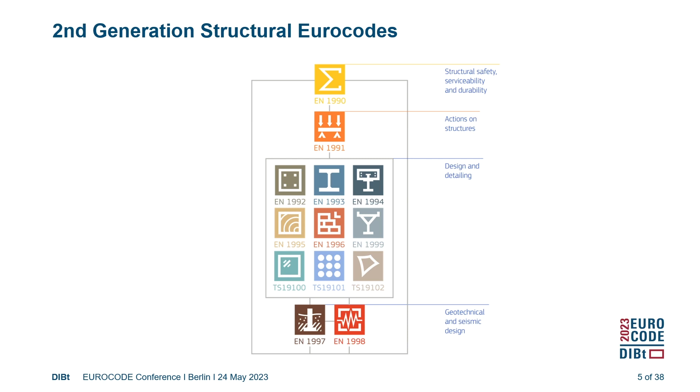So this is the structure of the second generation of the Eurocodes. The standards that many of you will be familiar with, running from EN 1990 through to EN 1999. The most observant within you will notice that we have 3 new additions in the second generation of the Eurocodes: TS 19100, 19101, and 19102, covering structural glass, fiber polymer composites, and tensioned membrane structures. And those are currently at TS standard level, but on a pathway to achieving EN status.

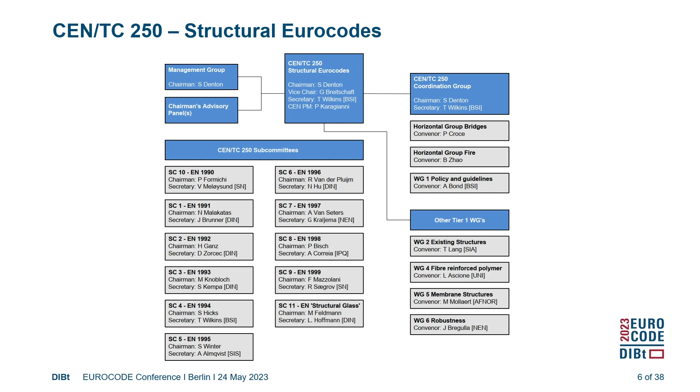And the way in which TC 250 organizes itself is that the responsibility for those standards rests principally with our subcommittees, and that's why it's such a pleasure that all of the subcommittee chairs are going to be speaking to you today and explaining to you what is happening specifically with each of those Eurocode parts.

So why do design standards matter? The speakers so far today have talked a little bit around the importance of standardization, but I wanted to share with you some of my perspectives on this.

The first point I want to make is impact. The Eurocodes are used by over 500,000 engineers across Europe and around the world. It's something that we talk about within TC 250 - that work we do, those decisions we take in those meeting rooms across Europe, it's easy to get focused around the kind of minutiae of what we're putting on each page and forget the impact of it. And it's so important that we always remember the impact of the decisions we take.

The second characteristic that makes design standards so important in the construction sector is that what we do is typically at a scale which means it's very difficult to test prototypes. In most branches of engineering, lessons are learned in labs and factories, but in construction, we tend to learn lessons on real live projects. And what's crucial is that before something is built, we need a means by which we can verify the adequacy of our design.

Design standards fulfill that role. They enable us to confirm that our designs will be safe, serviceable, durable, and robust before they are built. And that's a fundamental need within the construction sector, perhaps making standards more important in the construction sector than they are in probably any other branch of engineering.

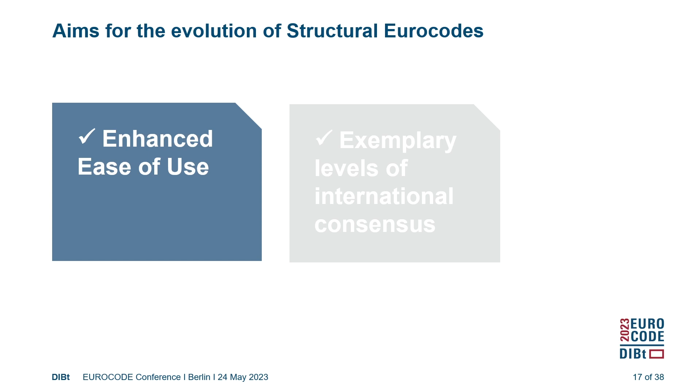What I want to do now is talk a little bit about the steps we've taken, the approaches we've taken, to try and fulfill these aims for the second generation of the Eurocodes. So firstly, in terms of enhancing ease of use, one of the first things that I did when I became chair of TC250 was I set up an international panel. It had 16 members, and that panel consulted widely across Europe to define what we meant by enhancing ease of use and to develop recommendations for how we should work to enhance ease of use with the second generation Eurocodes.

And to put that into practice, we established 5 pillars to support that: putting together statements of intent to meet users' needs, setting principles and priorities, providing examples for the thousands of people engaged in the Eurocode developments, looking at measures to try and understand how we were progressing, and then putting in place appropriate management, governance, and support.

So digging into these a little bit more deeply, in terms of those statements of intent, the users - one of the first things we did was to look at all of the different users of the Eurocodes to understand the diversity of users, but also to recognize, which I think is vital whenever you write any document, who is your primary audience.

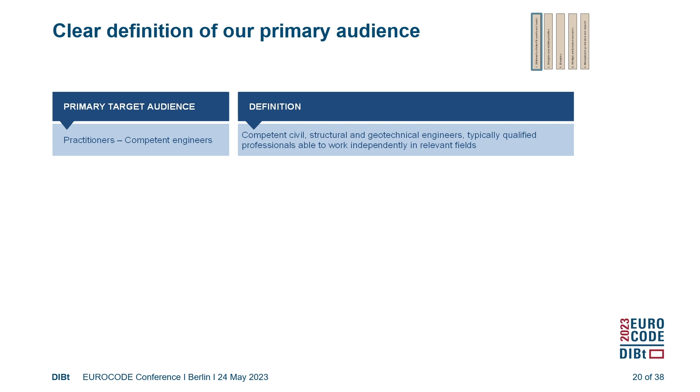So we defined our primary audience for the Eurocodes as practitioners and competent engineers - competent civil, structural, and geotechnical engineers, typically qualified professionals able to work independently in relevant fields. It took a little bit of time to arrive at that definition, but I think it served us very well, because there have been thousands of experts across Europe involved in the evolution of the Eurocodes.

And it's challenging to make sure that everyone works to a common baseline that understands those shared objectives. Having these kind of definitions means that whenever we're working on a document, we can think, well, does this fit for our primary audience? That's a really, really important thing for us to be able to do.

But we went further than that to recognize that we do have a lot of other users, and we mapped them out, and we prepared statements of intent for each of those groups of users.

So for our primary audience, we set ourselves that objective of saying we will aim to produce standards that are suitable and clear for all common design cases, but crucially without demanding disproportionate levels of effort to apply them. Or for expert specialists, aim not to restrict innovation by providing freedom to experts to apply their specialist knowledge and expertise. And there are, in developing standards, some very practical things that we can do to enable that.

For example, in the selection of the verb forms that we use: whether a clause is a requirement, a 'shall' clause, a recommendation, a 'should' clause, or a permission, a 'may' clause. But going further, for educators looking to have consistent underlying principles, or for regulators to produce standards that can be referenced or quoted in national regulations. So we set ourselves that set of statements of intent.

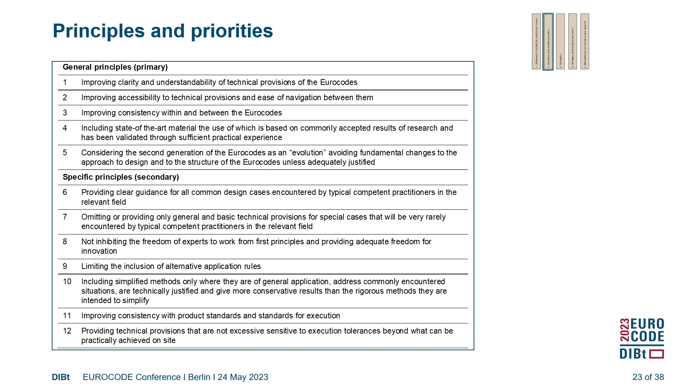And then what we've also put in place were those other 3 pillars around guidance and management, support and measurement. The appointment of our technical reviewer for the Eurocodes has been a really important step. So every single one of the drafts has been reviewed by Mary Pierangelino in her role as technical reviewer, or by Michael Fardis, my former vice chair. Everything has been scrutinized, not just within the experts in that field, but to look at the interdependence and across the whole suite to try and achieve consistency as well.

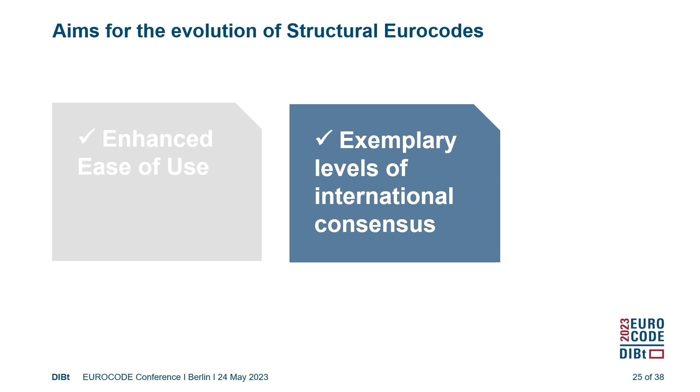So that detailed review of deliverables, guidance documents that we've put together, providing examples and advice and training for everyone that's been involved in the work - that's how we've looked to embrace that first aim, to enhance ease of use, and then the second, to achieve exemplary levels of international consensus.

My role as chair of TC250, one of them, is set out in the CEN internal regulations, and it says that my job is to do everything possible to obtain a unanimous decision, but if unanimity on a subject is not attainable, the chairman shall try to seek consensus rather than rely on a simple majority.

And I remember when I first read this in the CEN internal regulations, probably about 14 or 15 years ago, I'm not sure at the time I really understood what it meant, because if you've achieved consensus, have you not got unanimity?

But I've learned a lot over the last decade or so. And I think one of the key things I've learned is that consensus is not so much about the outcome, but about the journey you follow to get there. Consensus is not arriving at a destination which is every person's top preference. You can't always achieve that. People come into this work with different perspectives, different priorities, so we can't always achieve everyone's top preference. But what we need to do is try and arrive at an outcome that everyone can stand behind. That's what it means to build consensus, an outcome that everyone can support.

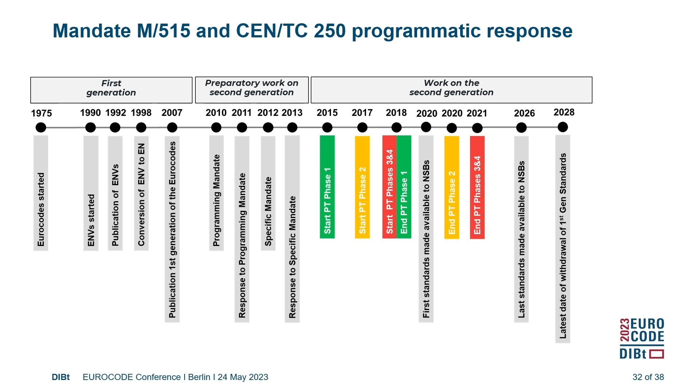In terms of the program, the timeline, this runs through a little bit of the history, going right back to the development of the first generation. As I mentioned, the work on the development of the second generation has been undertaken in four phases of project teamwork. All of that's now concluded. And now we're really at the business end of things, as Gerhard's already said, where we have the documents going through the processes of inquiry and formal vote.

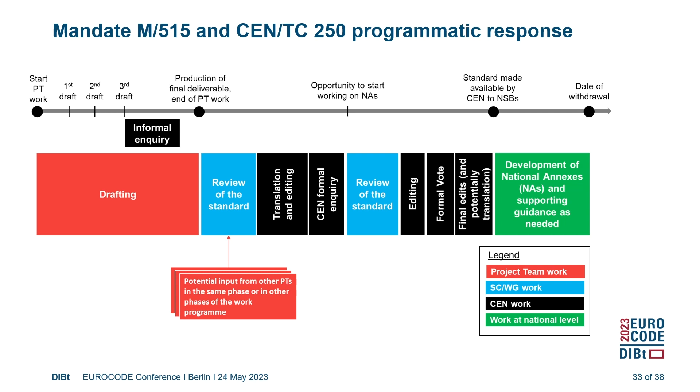There are defined steps that we take with this, and they're important. Each document, once it has reached a sufficient level of maturity, goes through a process of translation and editing and then a formal inquiry. That inquiry provides the opportunity for all of the CEN members to comment on a clause-by-clause basis on every one of the documents. Those reviews are received by the responsible subcommittee, and they're obliged to go through comment by comment and provide a response to every single comment we receive, sometimes thousands of comments, and then to produce the final version of the standard, which goes through the formal vote process I mentioned earlier.

And where we stand today is partway through this. We have some documents that have already gone all the way through to formal vote. We have others which are approaching inquiry.

It's useful perhaps for me to share briefly a couple of slightly technical terms because they may come up later today. One is what's called the date of availability of a standard, the date when CEN, the European standardization body, releases the documents to the national standardization bodies. And the date of withdrawal, which is the date by which conflicting national standards have to be withdrawn. In the Eurocode context, the conflicting national standards would be the first generation Eurocodes.

What we recognize, because the Eurocodes are an interdependent suite of standards, is that we can't treat these in isolation. You couldn't have different dates of withdrawal for different standards within the suite, as that could lead to quite a confused picture. So we have a common date of withdrawal that's been defined for all of the second generation Eurocodes.

The way this is going to work is that right now we have documents going through their inquiry and formal voting process. Some have already been made available to national standards bodies, meaning that at a national level, national annexes can start to be developed.

And just to finish, where we sit today - this is our program. People who've been working with TC250 will know this very well because we spend lots of time looking at this. We've been tracking this closely with all of the Eurocode parts, moving through all of the phases of preparation for inquiry and formal vote. You can see today we've had quite a number that have gone through formal vote, which is towards the end of the process. The inquiries, the yellow blocks, we're more than halfway through, and the final block of inquiries is going to happen for the second generation documents early next year.

So roughly, in terms of those inquiry and formal vote processes, we're probably past halfway. So we're a significant way down the track. We have a lot of very mature documents. We still have quite a lot of hard work ahead of us for the next couple of years.

And again, this is where we sit in terms of looking ahead to the inquiries and formal votes. As Gerhard rightly said, the timing of this conference, I think, is ideal. The documents are at a very mature state, but still going through those processes of inquiry and formal vote as we work to try and fulfill the aims we set ourselves for TC250 of enhanced ease of use and achieving exemplary levels of international consensus. And with that, let me wrap up now and hand over to the rest of the speakers. Thank you very much. Thanks.

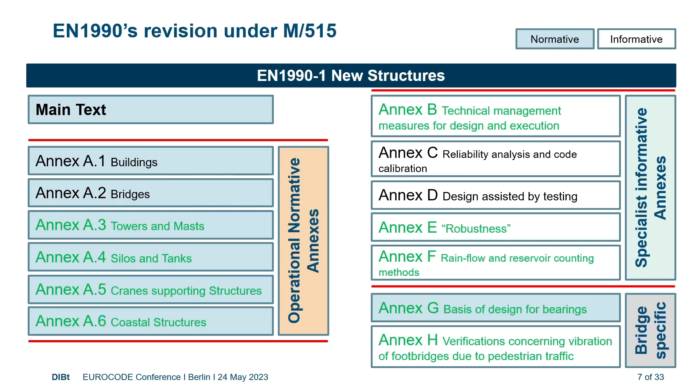So now let's start digging a little bit more deeply into the key revision aspects. I tried to put this together, but due to the time constraint, it's impossible to squeeze such a long work into a short presentation. I hope that this at least will raise your attention and curiosity to go and read.

But first of all, the very first innovation is in part 1, from the title. You will recognize that this is now 'Basis of structural and geotechnical design.' So what we have done is incorporate a number of overlapping issues that were in the first generation, taken from 1997, and we now have a full and comprehensive set of basis of design rules applicable to the design of geotechnical structures as well. To us this is a very important achievement in terms of enhancing ease of use, because basis of design is in basis of design.

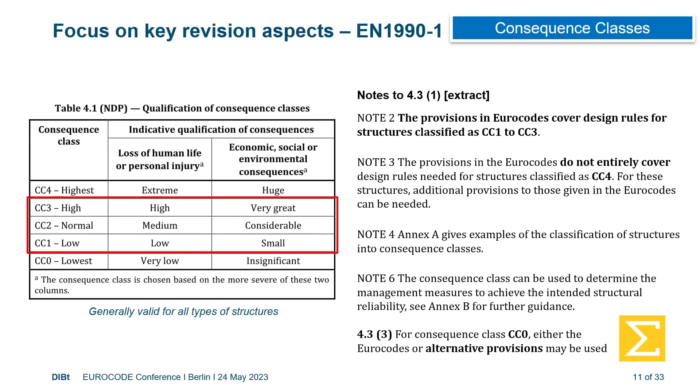Robustness is one of the requirements that we need to meet for the design of new structures, but we will see also for the assessment of existing structures as well. In general, for most structures, design in accordance with the Eurocodes is assumed to provide an adequate level of robustness.

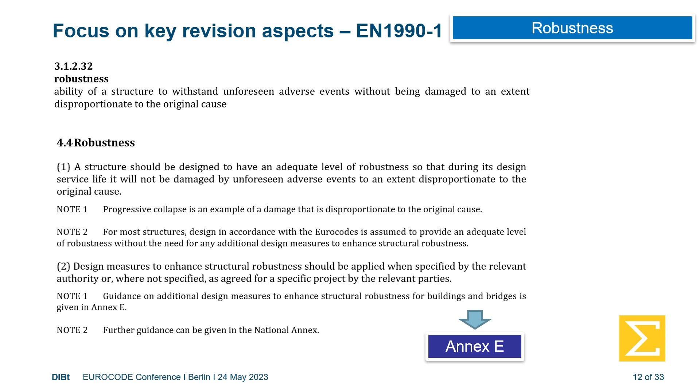So this is the very first important achievement of our discussion. If needed, and when this is needed is established by the national competent authority or by the client, or by needs related to the specific design, something more is to be done, according to measures to enhance structural robustness. These measures are outlined in one of the informative annexes, Annex E, a new one.

In the discussion we had, I will not go into the detail of Annex E, but just want to show you this table, because this is a result of a very long discussion, and to us is a very important point. We have clarified that robustness is normally the result of a set of activities.

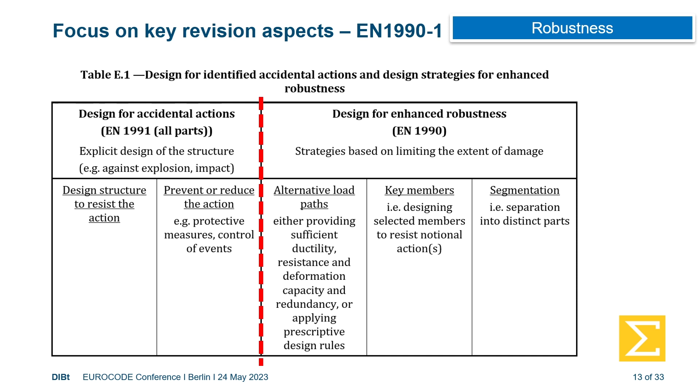It can be the result of designing for accidental actions, but this is our normal engineering verification. You have an action and you have a resistance and you compare. This is given by the left-hand side of the table. So you go in 1991, you take the accidental actions, and you do your verification. Nothing new. But this is providing robustness, not the enhancing robustness as intended in basis of design Annex E, which is the right-hand side of the table.

These are other strategies. You may provide alternative load paths. You may design key members to resist notional actions, or you may have segmentation of your structure in such a way that the collapse of one part does not affect the others. All these strategies are defined and specialized according to the different levels for the consequence class, and everything is written in this new Annex E.

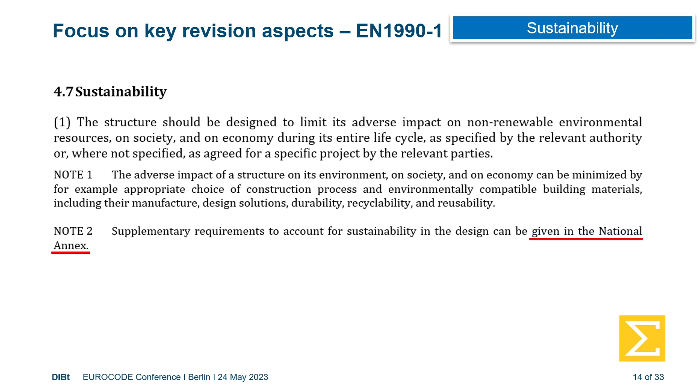Another important innovation is attention to sustainability. More and more this is relevant, as we have heard. We have this requirement to reduce the use of non-renewable environmental resources, which is extremely difficult to codify in a design standard. But what is important is that through this clause we have set a principle, a basic principle which can be achieved also by instructions given clearly in the national annex. You see in the note we're opening for further specifications to be given in the national annex on that.

Standards normally have a lot of performance requirements. We have reliability, durability, and so on, but it's on paper. We need to make sure that everything is transferred into the real world, into the building or into the bridge. How do we do that? Well, by implementing appropriate quality management measures, and this is codified in the main text.

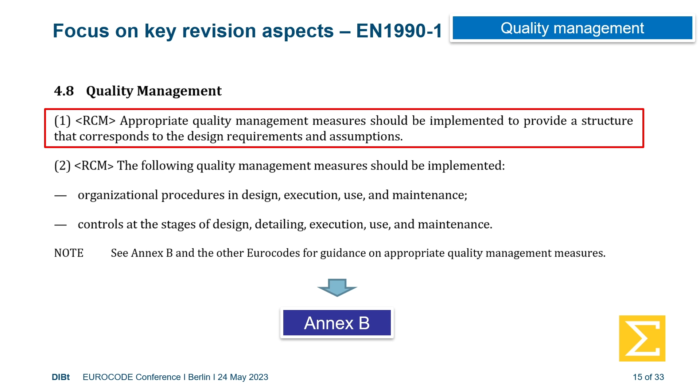This is clearly given here, that these measures should be implemented to provide a structure that corresponds to the design requirements and assumptions. This should deal with procedures in design, execution, use, maintenance, and so on. Again, how to achieve that is given in one of those informative annexes, in particular the new Annex B, which provides instructions on how to achieve these technical management measures for design and execution.

This defines four levels of activities, two of them dealing with the design stage: the qualification of the designer, first of all, and the checking of the design. The latter two deal with the execution phase, for execution quality, related to the execution standard, for example 1090 for steel structures, or inspection during execution, how to implement inspection procedures during execution.

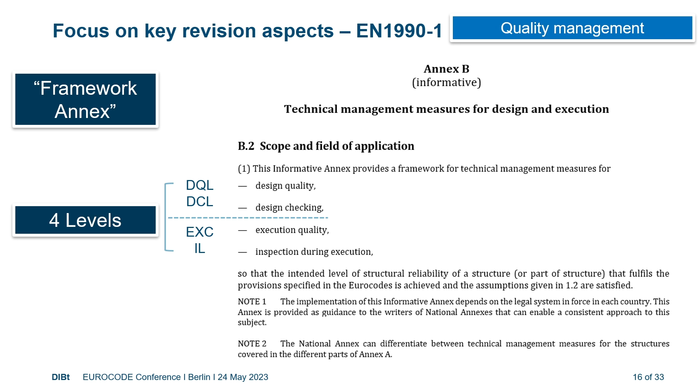This is a framework annex, because we're not giving the general rules for the qualification of designers. This is clearly something to do with national legislation. But in this framework annex, we set exactly a framework for how to use this information and how to implement this level of inspection and design qualification and so on.

In the end, everything is summarized by this table, which links the consequence class of your structure to the minimum level of qualification of designers, the checking level of the design, the execution, as we said, related to the execution standards, and the inspection level defined for the different classes.

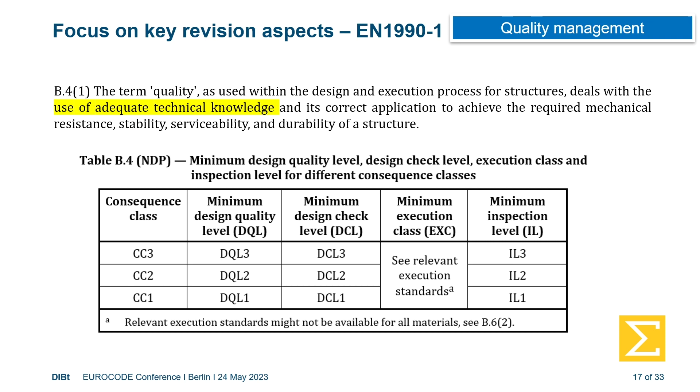Let's have a look at one example of the annex, the operational annex, for everyday use. This is Annex A1 for buildings, one big table with all partial factors. When I started my job as SC10 chairman, I got a comment that everything needed from us is combination rules and partial factors, which is maybe not really what is needed. But clearly this is one of the most relevant parts of the document, these partial factors that we use in combinations every day.

At first sight it looks complicated. I can promise you it takes 5 minutes to read it together with the notes, but everything you need is here. So for whichever combination you're dealing with, the partial factors are all given here. Notice we no longer have STR, GEO, and so on, but it's made clear by means of the notes and the text before the table. You just pick up your partial factor from this table whether it's a structural resistance verification or a geotechnical verification. Again, 5 minutes to read it the first time, and we hope much easier to use in future. This substitutes the 3 tables we had in the annexes in the first generation.

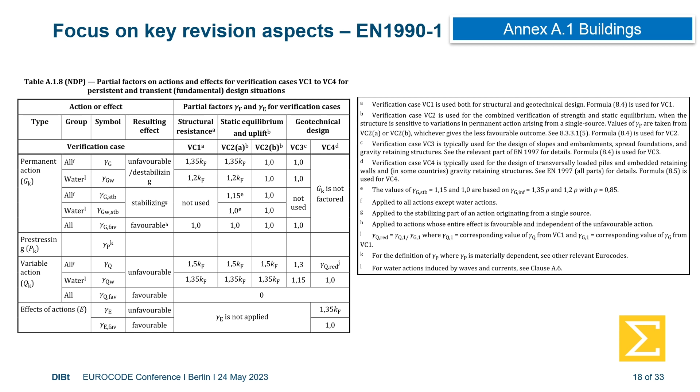Another important innovation is about serviceability criteria. In the first generation of 1990, there were only recommendations to meet serviceability criteria for buildings and bridges, but there were no suggestions or recommendations for limiting, for example, vertical and horizontal deformations and so on.

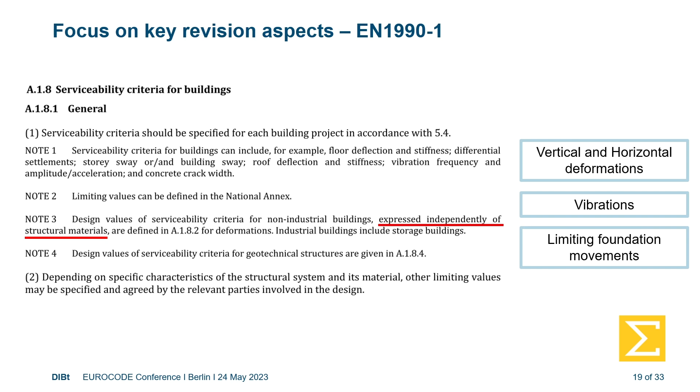What we have done is collect all the values and limitations in use in different countries. There was another group active on this in SC10 for this specific purpose. We put together the best practice collected in different countries for three areas: vertical and horizontal deformations, vibrations, and limiting foundation movements. We ended up with a set of recommendations independent of the material, as the basis of design is material independent. So what you'll find is an example for vertical deflection.

You're familiar with the figure, taken from the existing standard, showing the different components of deflection of the horizontal member. But you'll find a table, which is an NDP, providing you, depending on the nature of the limit state you're checking—whether governed by the characteristic, frequent, or quasi-permanent combination, and depending on the reversible or irreversible nature—the limitations suggested in this table.

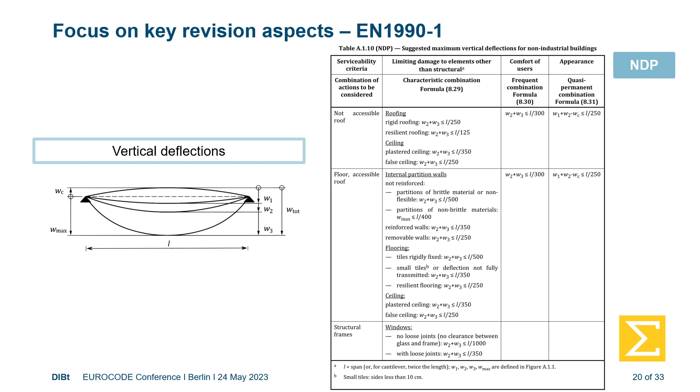The hope is that we can use this table to harmonize the limitations in the future across different member states. For example, if you're designing a beam in a floor and your internal partition walls are not reinforced and are fragile, you'll find the limitation is L over 500, for example. This is a recommendation to be confirmed as an NDP. Something similar is given for horizontal deflection, and an approach for vibration as well.

But another innovation is on limiting foundation movements. This is again completely new in the standard. We have focused attention on three important foundation movements which can lead to ultimate limit state or severe serviceability limit states, out of the number of foundation movements first described by Burland and Wroth in 1975. We focused attention on differential settlements (delta S), tilt (omega), and relative rotation, the angular distortion (beta), and how it is managed.

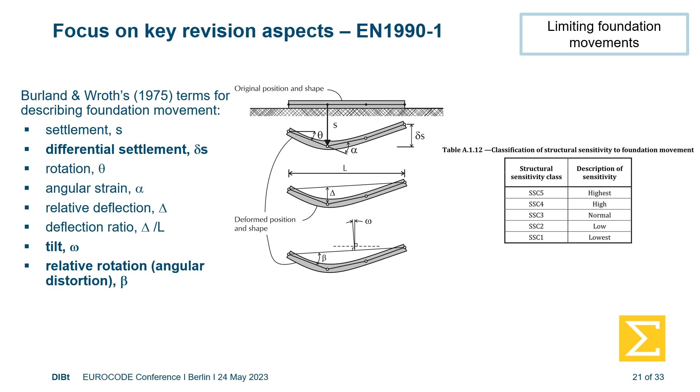Buildings are classified into different structural sensitivity classes, from 1 to 5, from the lowest to the highest sensitivity, and according to the classification in the sensitivity class, you will find, again as an NDP, recommended values of limitations for all these different foundation movement limits.

This is something more specialist, Annex C. It has always been for specialist users—reliability analysis and code calibration. What we had as feedback from the first generation was that this annex was considered a bit more theoretical. But this annex is a core part of the standard because it provides the values of the beta targets.

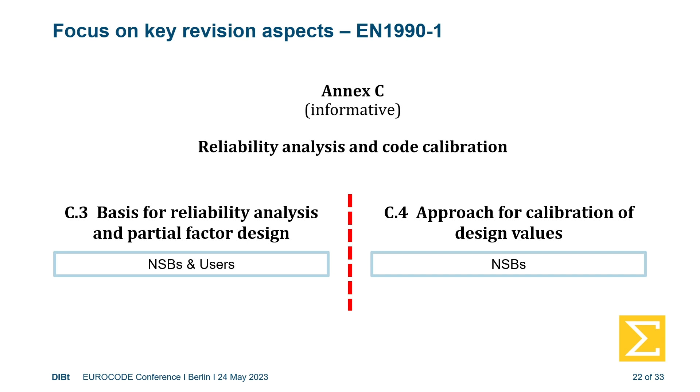These are the reliability targets that we want to meet by means of partial factors or other methods of calculation of our structures. So we tried to make it more readable for users, and in particular we made a clear distinction between two parts of this annex: the basis for reliability analysis, and partial factor design, which is for users intending to apply reliability-based methods. So here you will find instructions and the agreed methods to be used.

And the other one is for national standard bodies because it provides guidance on the calibration of partial factors, which is something which is not for users, of course, but we need to provide a common guidance for that as well.

You see here, this is the table with the beta targets, which are the recommended values, no change with respect to the previous edition. They're given in terms of 1 year or 50-year reference. Importantly, we have related also in the 50-year column the corresponding approximate value of the probability of failure in 50 years, so you see the idea is to have one order of magnitude difference in different consequence classes.

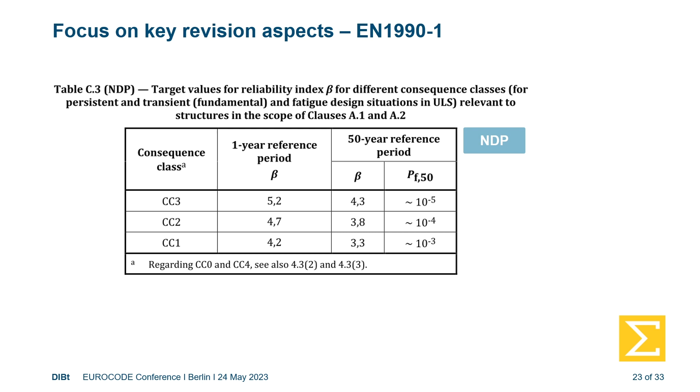Another important work that we have done in SC10 is to provide a JRC technical report. We have worked a lot on this, and there was a team of members, experts coming from all subcommittees. This will be made available, we hope, in the second half of this year. It includes the background, the history, what is behind the semi-probabilistic verification method, and also the guidelines for the implementation of the probabilistic and risk-based methods, and importantly, the annexes, in particular Annex A, with all the stochastic models for the variables that we use in the calibration of partial factors.

Very few words, I hope I'm in time, on Part 2. Part 2 is for assessment, as we said. It's completely new. It has been a very long discussion. We inherited the work of WG2 with Thomas Lang sitting here, and we had to transfer this into the framework of basis of design. This was a very long discussion. We ended up in April, so I would say yesterday, and the decision was taken to have this Part 2, covering the assessment of existing structures.

It is not really a self-standing document. It has to be used together with Part 1, because many parts of Part 1 are still applicable to existing structures, such as combination or the use of the partial factors and so on. This is again covering geotechnical structures, so the assessment of existing geotechnical structures as well. This is not covering seismic verifications, this will be covered by Part 3 of Eurocode 8, as historically has been covered.

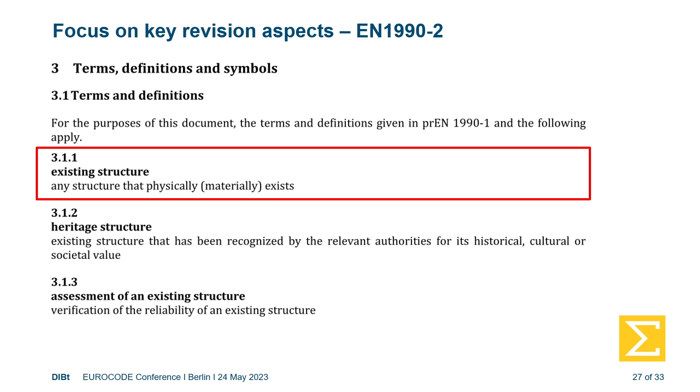I really, it's impossible to summarize a very long discussion we had like this, but it's just to draw your attention on some spots. The first one is existing structure. The definition of an existing structure is a very simple question with an extremely complicated answer. We could not find a satisfactory definition valid for all the member states, because you understand that there are a number of legal implications on what is an existing structure.

It has to be in use, it has to be transferred to the owner, who's the owner, by which act. So the definition is quite simple: any structure that physically, materially exists. But what is given is the possibility in the clauses in the main text of this document to add something in your national annex and to specify more details on what you think and what you define as an existing structure, and this is given here, you see, in the first red box.

We have in these assessment methods both quantitative assessment methods, which is the main way to perform the assessment according to the normal engineering practice that we use for new structures, but we also have some qualitative assessment methods which can be used in place of quantitative. This again depends on the national annex, on the experience that you gain at national level for certain types of structures, for example, and can be used to assist the definition of the scope of the quantitative assessment method. So it's a set of methods which are offered as possibilities to the assessors.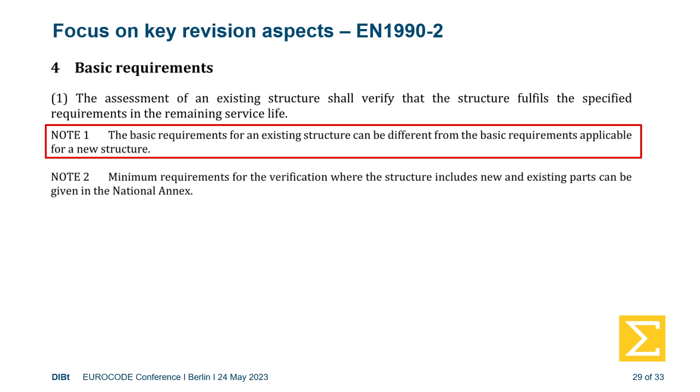Important part: clearly the basic requirements for existing structures are not the same as for the new ones, and in particular they can be changed, the reliability targets. Typically, for existing structures, we can accept a lower level of reliability because the structure is existing, so it's already survived a number of events. But this is, again, clearly stated and clarified in the text.

How to do that? The assessment needs to be done according to the partial factor method, so it's completely consistent with the experience that we have gained in the new structures. But there is also an opening not to prevent innovation, not to prevent deepening of the analysis, to the reliability-based method and to the risk-informed method. Clearly, there will be a restriction possibly in the national annex for that.

Want to finish with showing you this flowchart.

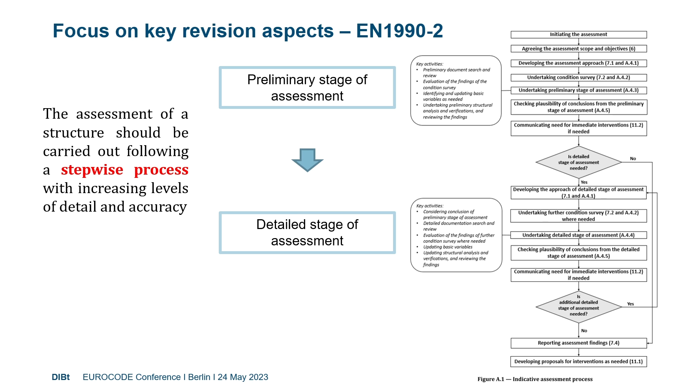We won't go into detail, but you'll recognize that the approach for the assessment of existing structures is clearly a stepwise process. We start from some preliminary activity, then go deeper and deeper if needed, and we can exit the process if we think the preliminary stages are satisfactory. Finally, if the outcome is negative, if the structure is not fulfilling the performance requirements, then what to do?

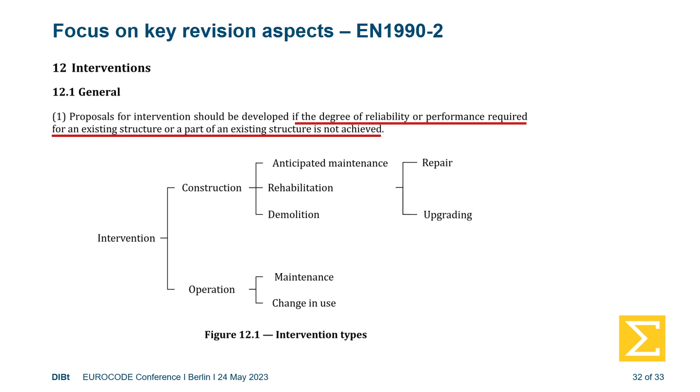Well, we have some general principles on interventions, which can be constructional or operational in nature, and this is current practice. Constructional intervention can include maintenance, if anticipated in the design, or rehabilitation, which is repair or upgrading of the structure, or even the worst case, demolition. For operational cases, you can have maintenance again, or a change in use to reduce the loads, for example, to make this acceptable.

Thank you. Thank you very much for your attention.

I think the thanks goes to you. This was really a very informative talk, and just on time. Thank you for this. We will now have a look at actions on structures with Nick Malakatas. Thank you, the stage is yours.

Thank you, everybody. Let me also express my pleasure for being here and contributing in this workshop. Thanks to DIBt and Gerhard.

Ladies and gentlemen, and dear colleagues here in this room, and so many of you connected online, I'll try to make a rather ambitious task, and you'll see what I mean, to present you the key changes and updates of Eurocode 1, which is a quite voluminous standard with a dozen parts, as you see, and mainly focused on actions and loads for buildings, bridges, and other civil engineering structures.

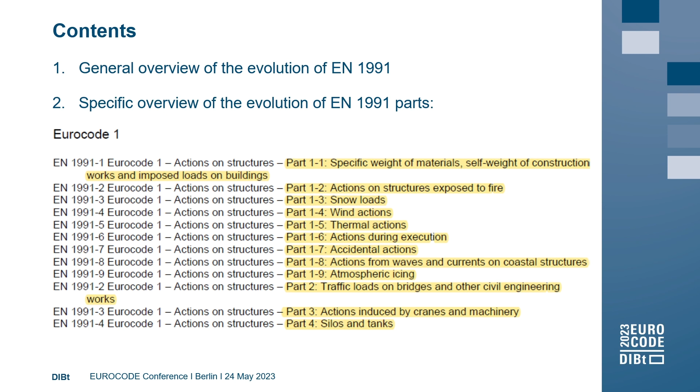You recognize imposed loads, self-weight, fire, snow, wind, thermal actions, execution, accidental actions, and the new parts: actions from waves and currents on coastal structures and atmospheric icing, and also traffic loads on bridges, crane supporting structures, and silos and tanks.

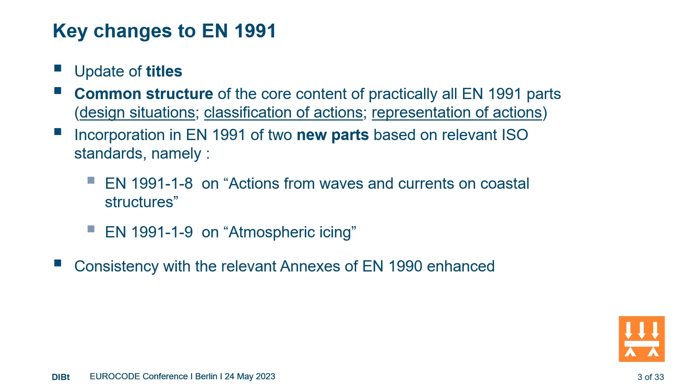So basically, except for some update of the titles, we have achieved to create a practical, common structure for all Eurocode 1 parts concerning the core content, mainly the design situation, the representation of actions, and the classification of actions. As I just said, we have two new parts that have been based on the relevant existing ISO standards. Finally, we have improved the consistency with EN 1990, which you just saw presented by Paolo Formichi.

So I'm afraid there will not be so many figures, but I will try to give you the most relevant information. For example, we have introduced and clarified some notions like the tributary area, the area which is loaded and should be considered in the design.

We have now a single table with all categories and subcategories of use for buildings, and similarly for the horizontal loads on partition walls and parapets.

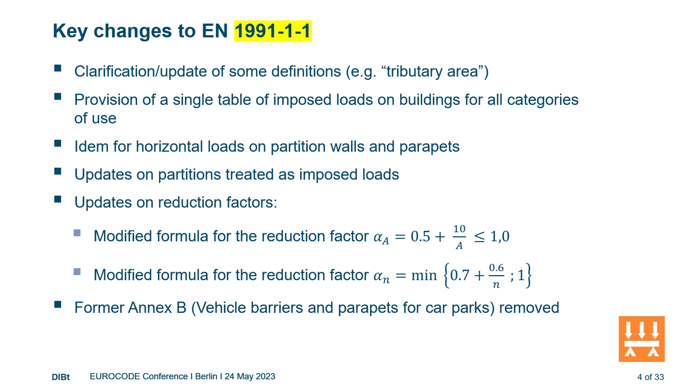We have some updates on the treatment of partitions, like imposed loads, as it was already in the document, but we have made some changes. We have also modified the two well-known formulas of the reduction factors: alpha A, to reflect the influence of the loaded surface and area, and alpha n, to reflect the number of stories. And the former Annex B has been removed.

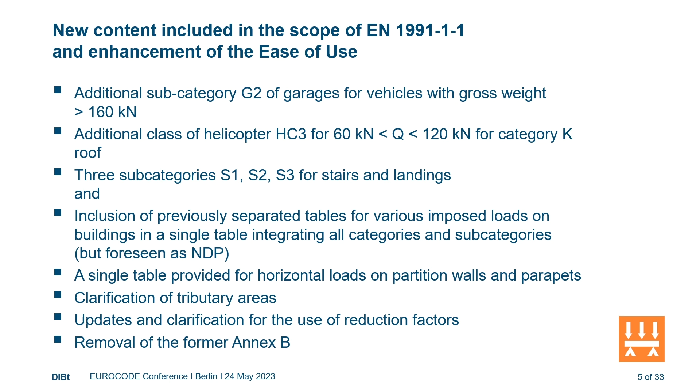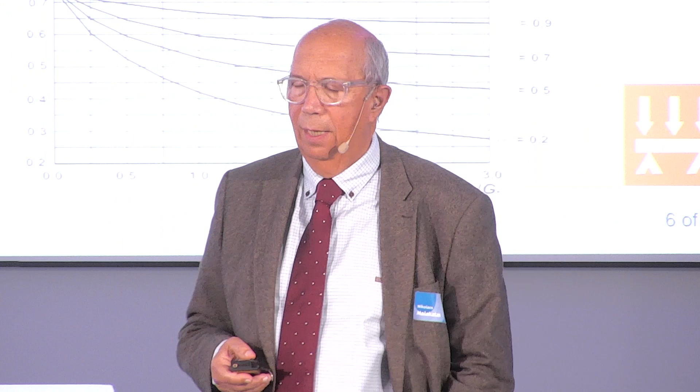We have also added, for example, an additional subcategory for garages and parkings, an additional category for roofs designed for helicopters, and subcategories for stairs and landings. All the rest has already been said, it's just a list of the parts that have an improved enhancement of ease of use.

Now, coming to actions due to fire, we have clarified the scope, especially as far as non-coverage is concerned. There are three items: first of all, we don't deal with sprinklers and active measures, nor with conditions of occupancy of buildings and fire compartments. And we don't deal with insulation materials, coating materials, and so on - those are matters for product standards.

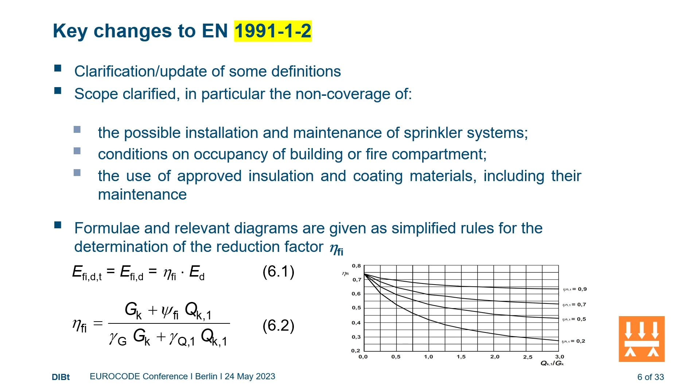We have some new formulas and figures, as you can see, to allow for a simplified calculation of the design fire.

Now, in the already existing Annex E, which is the annex on fire load densities, fire growth rates, and rate of heat release, we have the delta factors, which describe and reflect the different active firefighting measures. For example, sprinkler detection, smoke detection, automatic alarm transmission, the intervention of the fire brigade, and so on, has been revisited.

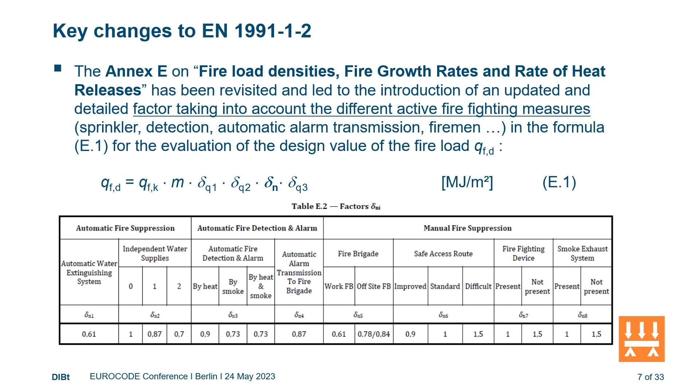And when you find the time to look in detail, you will find a very comprehensive presentation.

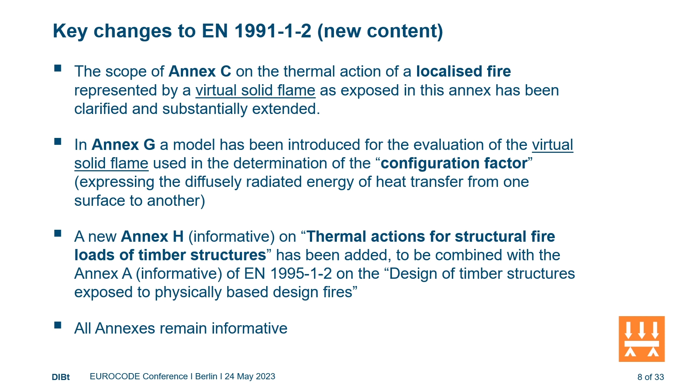In the former Annex C, which dealt with local fires, we have extended this annex and added design models, virtual solid flame as a geometrical design model. And equally on Annex G, which describes the so-called configuration factor expressing radiation of energy and heat transfer, we have made some improvements. The most important addition is the new Annex H, an informative annex concerning thermal actions for structural fires for timber structures.

Then I come to snow, and with this opportunity I have to say it was Paolo Formichi himself who was the convener of the relevant project team and group. There are quite a number of additions and renewals in this part. Just as a reminder, the snow part of the existing Eurocode has been based on a European research project in 1996, so almost 30 years ago, and some European countries at that time were not part of the project. So there was a need for changes, basically the development of new models closer to physics and based on experimental data from European climates.

Additional types of roof, additional cases, and specific models for snow local effects. We are now using the terms balanced and unbalanced for snow, not drifted and undrifted as in the ISO and the American snow standard. The Ce exposure coefficient has been updated to take into account the snow load for locally sheltered areas.

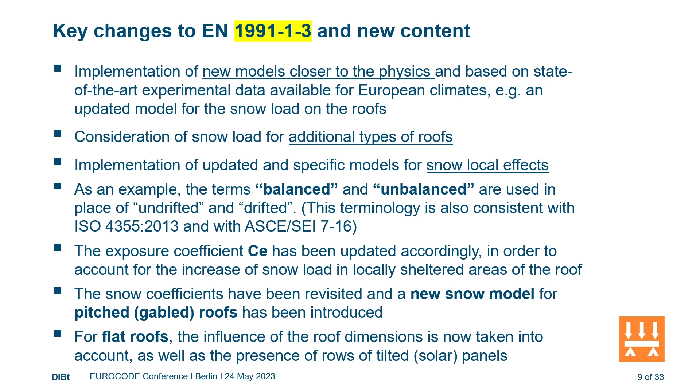We have some updates for cylindrical roofs and for domes, with a model which is closer to reality but more simple than the ISO model. And for multi-span roofs we have now made some corrections so that in the so-called valley between the roofs, the snow does not exceed the ridge of the roof. And finally, we have introduced two more models concerning drifting at obstructions, and also the intersection of roofs.

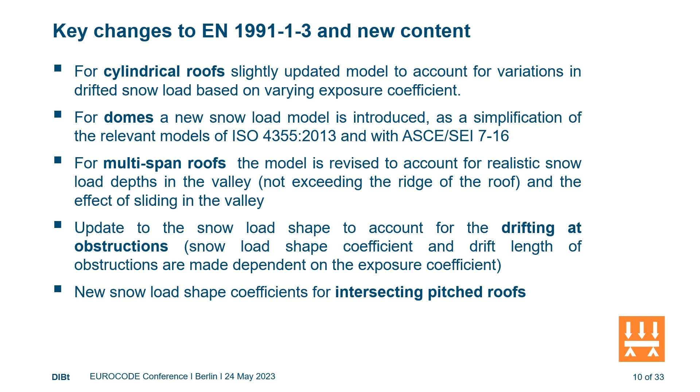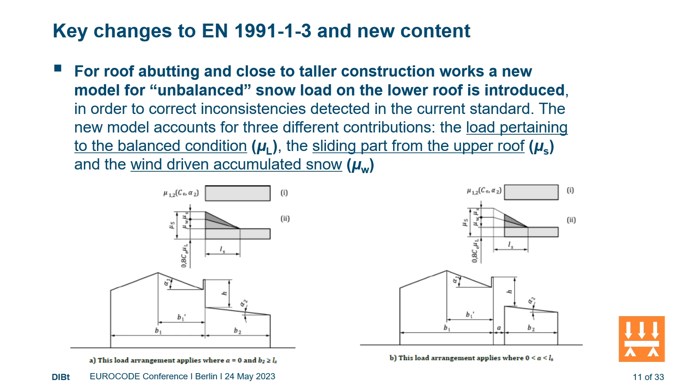And just another issue concerning buildings with different heights, one close to the other. We now have a model much closer to reality, with three components: one part for the load pertaining to balanced conditions, a second part to represent the sliding from the taller roof to the lower roof, and finally the wind-driven accumulated snow part.

So this is about snow. Concerning wind, we have made progress in the sense that we have extended the scope, the coverage for buildings up to 300 meters instead of 200 until now. We have a new formulation for determining the velocity, mean velocity and turbulence up to 300 meters. As you probably remember, we used to have two methods for the so-called structural factor, CsCd. Now we have a single method.

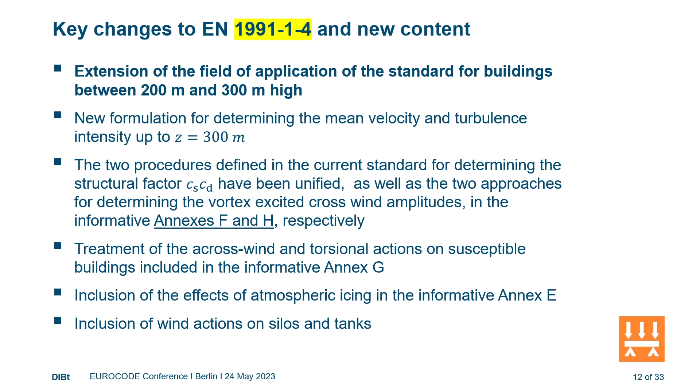We have merged the two methods in Annex F, while in Annex H we address the vortex-excited crosswind amplitudes, and also in Annex G, devoted to crosswind and torsional actions on buildings susceptible to torsional effects. We have also addressed the effects of atmospheric icing on wind, and we have added some clauses for silos and tanks.

The most important thing is that the aerodynamic coefficients, the pressure coefficients, which used to be in the main text, are now transferred as normative annexes, C, D, and E, concerning pressures on surfaces, pressures across walls, and forces on structures. We have added a number of additional cases, so we have a more extended annex. We have also transferred from the actual Part 3.1 of Eurocode 3 the part of wind concerning lattice towers and guyed masts.

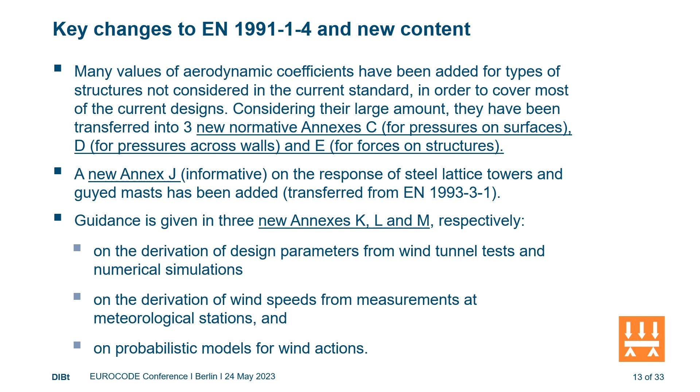And we have three more annexes: Annex K, for the derivation of design parameters from wind tunnel tests and CFD methods, numerical simulations; Annex L, for the derivation of wind speeds based on meteorological measurements; and a short Annex M on probabilistic models. As far as thermal actions are concerned, there are not so many things that have been changed, only some updates, merging of tables, and redrawing of figures.

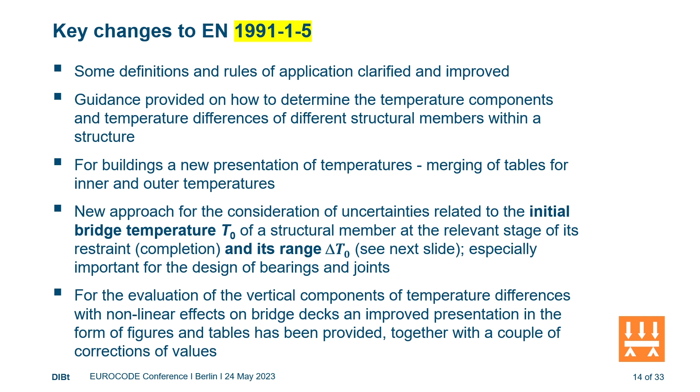An interesting new approach that has been added concerns the uncertainties related to the initial bridge temperature and to the range of this for structural members at the stage of completion of the restraint. So if we look at the next slide, you can see here it should be T0, and then delta T0, which express the uncertainties.

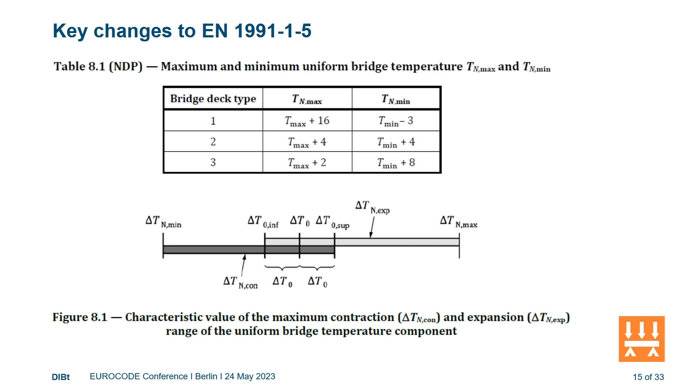Now, concerning the part devoted to actions during execution, we have made some progress concerning the delimitation of the scope of the field of application of the document as compared to relevant existing standards, for example product standards for formwork, scaffolding equipment drafted by Technical Committee 53, and for auxiliary structures.

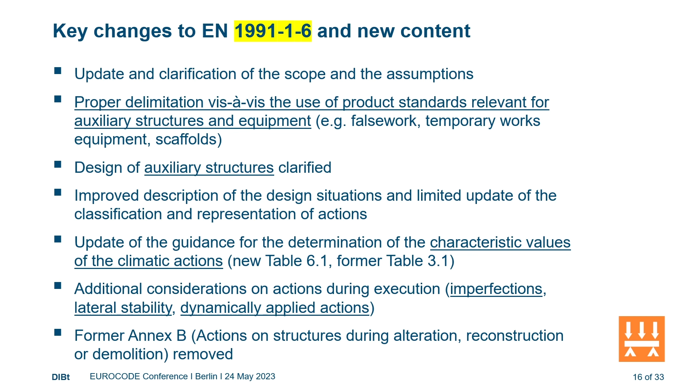We have improved the design cases to be taken into account, and we have added some aspects concerning imperfection, lateral stability, and dynamically applied actions. The former Annex B has been removed.

Last but not least, the former table 3.1, which is now table 6.1, gives guidance for the determination of the characteristic values of climatic actions during execution. You will recognize the table.

This is the typical case where you have a duration of more than 1 year, so you have the 2%, 1 in every 50 years annual probability of exceedance. In case you have a shorter duration, but more than 3 days, it's a similar procedure, but you have to take into account seasonal variations, while for very short periods, you have to rely on reliable meteorological data.

We have also offered, in a way, the possibility for the relevant authority to specify a threshold value or a range of values. This has some practical importance in some cases, when the use of this threshold value has an impact on deciding whether to go on with the execution or not.

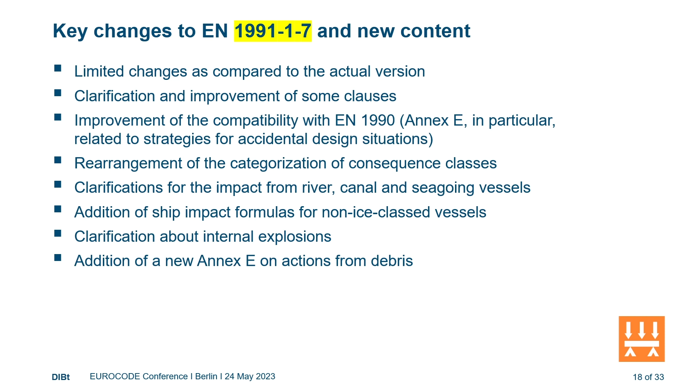And there is an addition of a new Annex E, which I would say is inspired by the existing German national annex, and refers to debris.

We have two new Eurocodes. The first one concerning waves and currents. It doesn't make sense to compare, except with the ISO standard. The main difference is that our part focuses only on actions, whereas the ISO standard was also a design standard.

The ISO standard did not follow the full reliability framework and partial factor method as in the Eurocodes. We have to frankly admit that it is not so obvious to comply 100% with the reliability framework of Eurocodes for all types of coastal structures, especially for breakwaters.

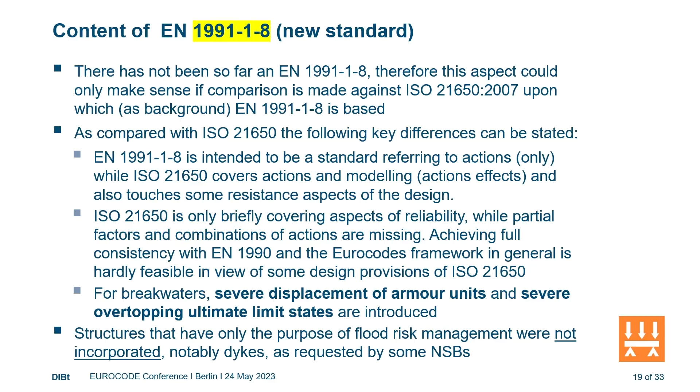That is why we have introduced two more ultimate limit states, the so-called severe displacement of armour units and severe overtopping. This is specifically for breakwaters, while as far as flood risk management is concerned, we have practically excluded this topic from the field of application, from the scope of the standard.

We have two important parts, one concerning the use of physical modeling in laboratory tests, scale tests, and the other one, some additional specifications for reliability.

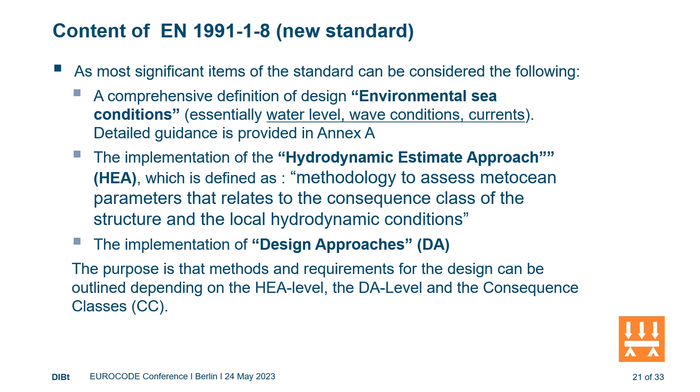The basic notions are, of course, the environmental sea conditions, the water level, wave conditions, height, frequency, and so on. The so-called hydrodynamic estimate approach, which is related to hydrodynamic conditions and measurements, and the design approaches.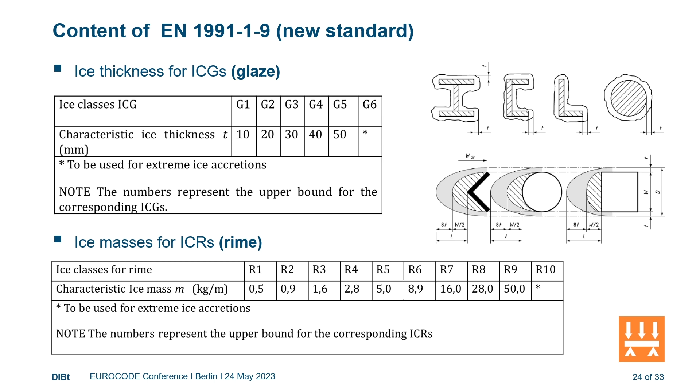I will finish in a couple of minutes, I guess. Concerning the traffic load part, which was a well-developed part, the main issue was the addition of the extension of the scope for the application to other engineering structures.

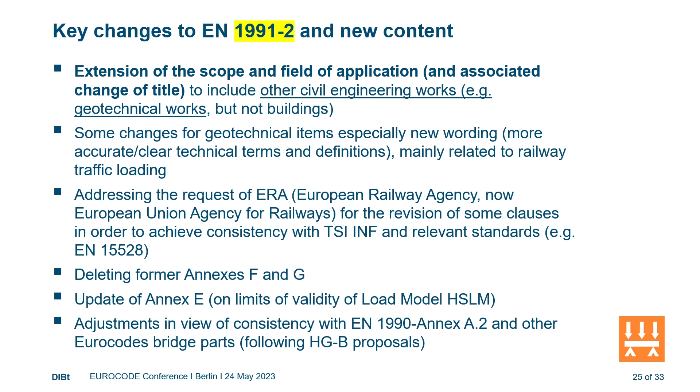Essentially the geotechnical structures, where we have introduced two new sub-clauses, one for road bridges and the other for railway bridges, devoted to embankments and geotechnical structures. We have also issues concerning the track bridge interaction, noise barriers, etc.

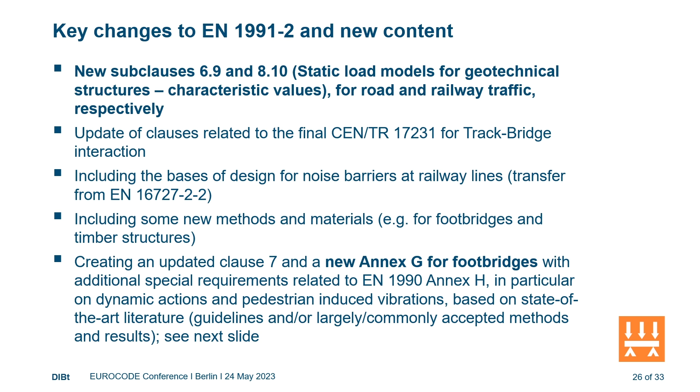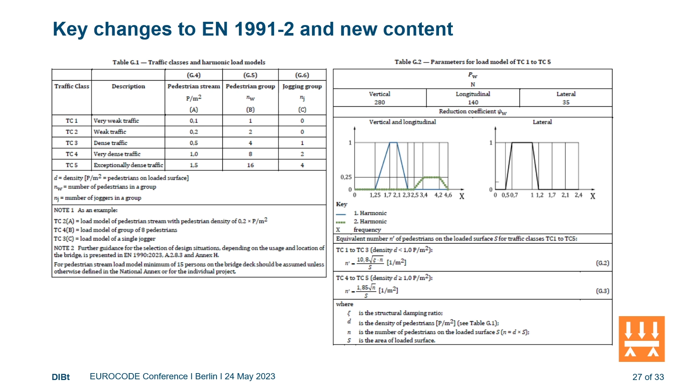And the most important probably is the addition of a clause and a new Annex G concerning the vibration and generally the loading of footbridges. You can see here, for example, the classification of footbridges depending if you have a pedestrian stream, a pedestrian group or a jogging group. And those are typical models for loading.

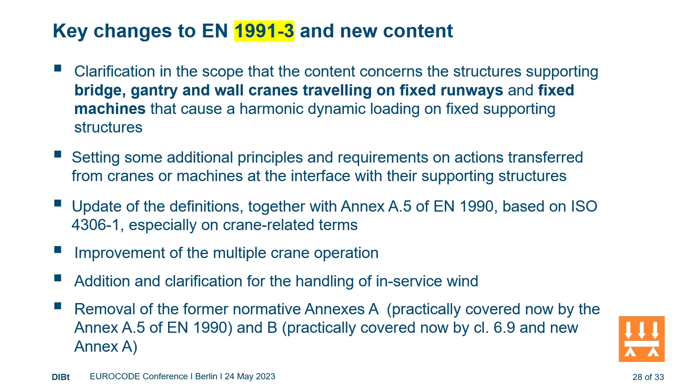Two words for cranes. There are some additions and clarifications. The main improvement being the removal of the former normative annexes, which are covered by other annexes now, and the fact that we have now the typical bridge and gantry cranes, and their fatigue classification is in a new Annex A, compatible with the crane design standard.

In Annex C, we have added calculation for wall cranes, traveling wall cranes. And we have also a guidance for crane-induced actions for when we don't have any technical data.

And finally, concerning silos and tanks, we have a much more developed, better developed standard now. We have added sections on silos with inverted cones, with rectangular flexible walls, asymmetrical conical hoppers, overpressure factors, thermal differential causing pressures.

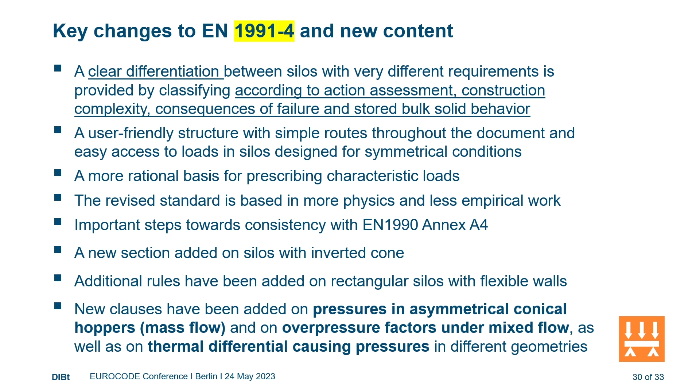And the basic differentiation is between the so-called fundamental load cases, which is symmetrical filling and discharge loads for various slenderness, and silo hoppers and bottoms. And finally, the special load cases, vertical walls, hoppers, and silo bases with unsymmetrical pressures, high slenderness, large eccentricities, filling loads for squat or intermediate slender silos or pipe flow, and so on.

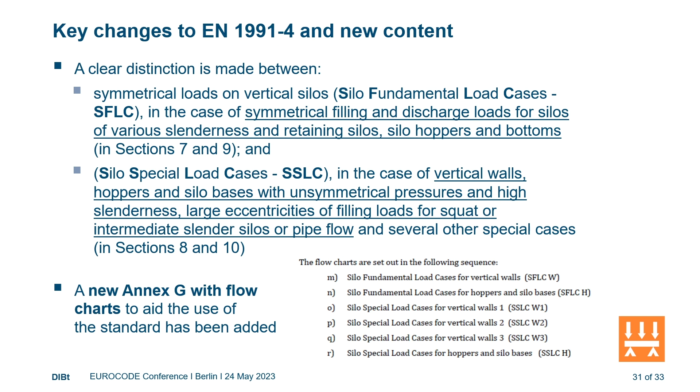Well, thank you very much. I hope I did not spend much more time than. Thank you very much.